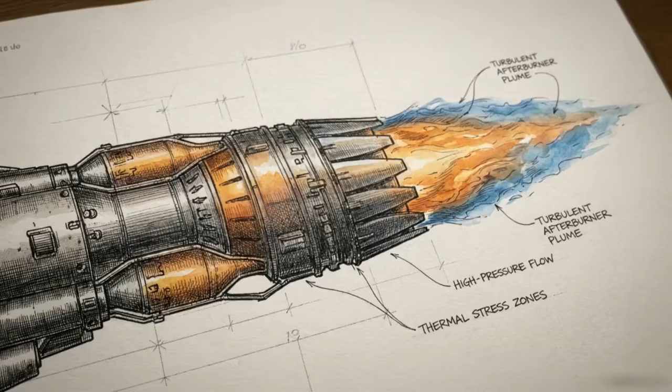Mastering aerospace propulsion is one of the most grueling industrial filters a nation can face. Designing an airframe requires mastery over aerodynamics. Building the engine that powers it requires absolute mastery over extreme thermodynamics.

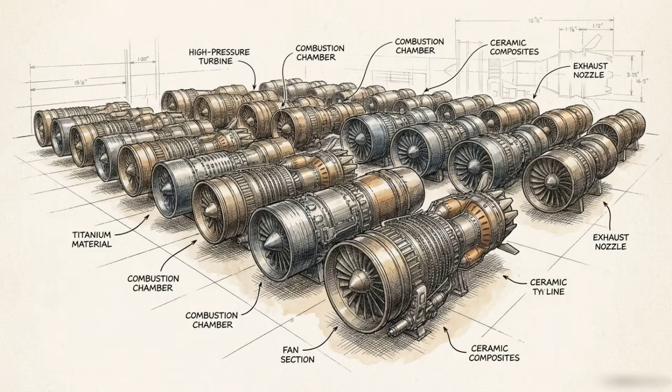In the 1980s, India launched the GTX-35VS Kaveri engine program. The objective was to provide an indigenous power plant for the HAL Tejas light combat aircraft. The scope of the research and development effort was massive. Over 3 decades, the gas turbine research establishment spent approximately $250 million. They built 9 prototypes and conducted 3,217 individual tests.

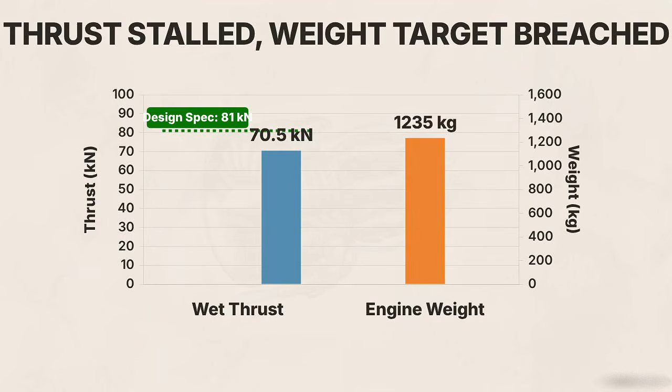This chart reveals the critical shortfall. Designed for 81 kilonewtons of wet thrust, actual output stalled at 70.5. Simultaneously, it suffered a severe weight overshoot. Against a target of 1,100 kilograms, the hardware weighed 1,235, with early prototypes peaking over 1,400.

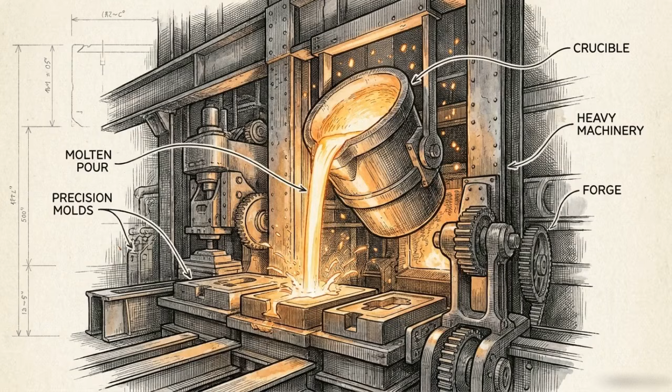The Kaveri did not fail because of a miscalculation in its aerodynamic design. The project hit a hard physical limit in materials science, located entirely within the engine's hot section. An engine cannot be willed into existence through blueprint design alone. To achieve target thrust, a manufacturing base must be capable of conquering the extreme temperatures of the turbine core.

India attempted this technological leap largely in isolation, a condition catalyzed by the 1998 Pokhran nuclear tests. In response to the tests, the international community imposed severe sanctions. This immediately cut off the Defense Research and Development Organization from Western metallurgical technology and critical testing infrastructure.

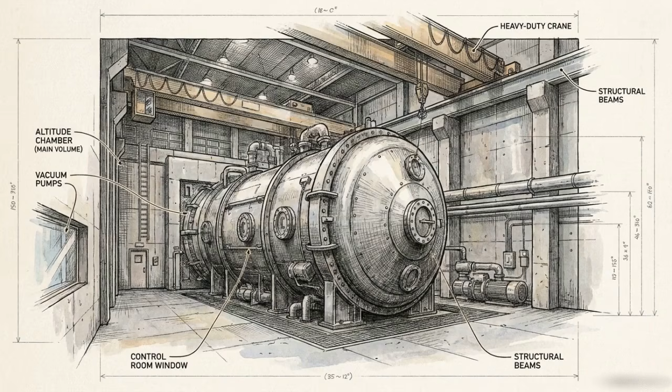The domestic infrastructure gap was severe. India possessed no facilities capable of simulating high-altitude atmospheric conditions. To validate the Kaveri prototypes, the testing process had to be outsourced to Russia, utilizing Tu-16 and Il-76 flying testbeds. These geopolitical sanctions exposed a harsh industrial reality. Without a mature domestic manufacturing ecosystem, engineering teams are incapable of bypassing a metallurgical bottleneck.

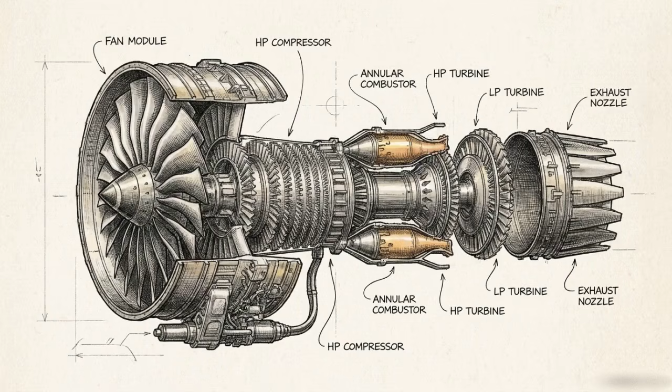To understand exactly why the Kaveri stalled, we have to look past the macro history of the program and isolate the microscopic point of failure, the high-pressure turbine blade. This schematic cross-section of a turbofan engine highlights the high-pressure turbine.

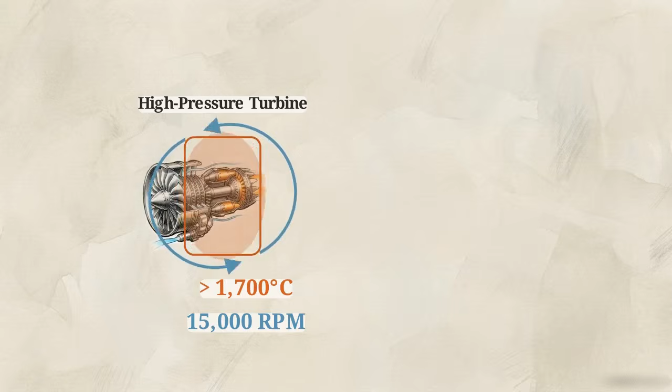This is a hostile operating environment. The ambient temperature of the ignited fuel and air mixture exceeds 1,700 degrees Celsius, while the turbine spins under a centrifugal load of 15,000 RPM. This environment is governed by turbine entry temperature, or TET. There is a direct mathematical correlation here. Higher turbine entry temperatures yield greater thermodynamic efficiency and higher raw thrust.

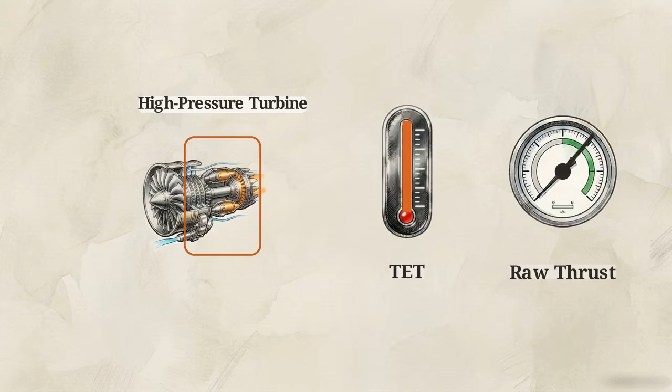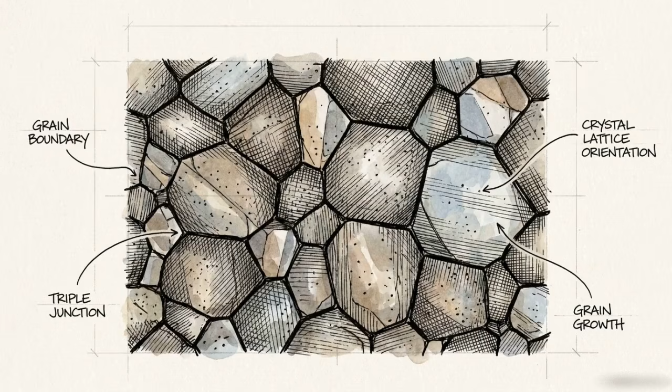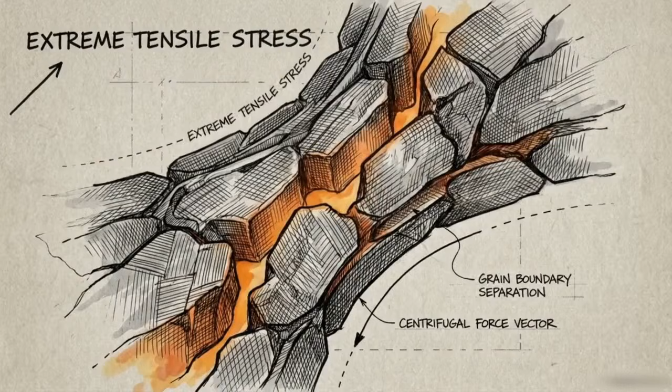Early Kaveri prototypes relied on standard polycrystalline alloys. At a microscopic level, these metals are composed of multiple intersecting crystal grains packed together. When subjected to the dual assault of 1,700-degree heat and massive centrifugal stress, the boundaries between these crystal grains become weak points. They stretch, deform, and crack. In metallurgy, this failure mechanism is called creep rupture.

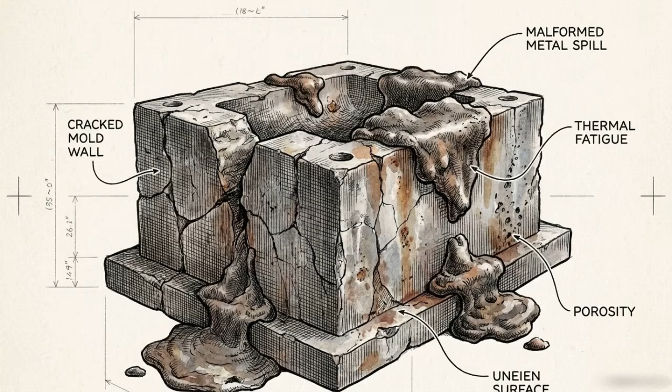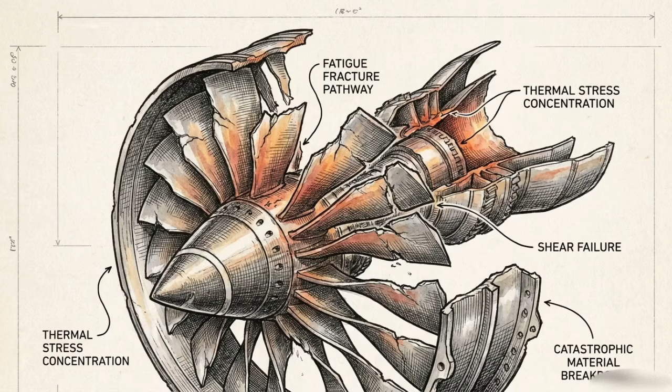India lacked the scaled production capability for the high-purity superalloys required to survive peak TET. Without those materials, increasing the heat to reach the 81 kilonewton target would result in the physical destruction of the turbine. Eliminating creep rupture requires a specific manufacturing breakthrough, single crystal metallurgy.

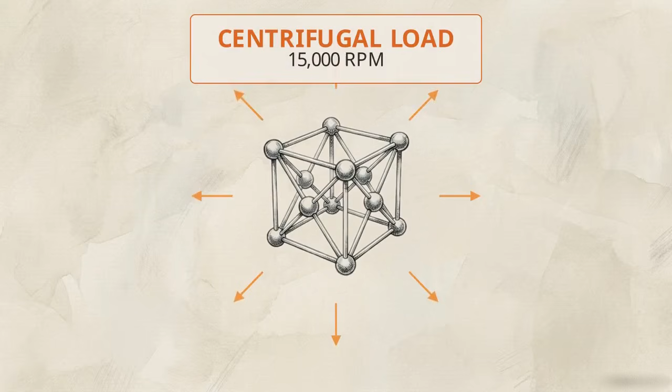This process relies on directional solidification and vacuum melting. By drawing the molten superalloy through a helical crystal selector, engineers can force the metal to cool into a single unified crystal lattice structure, entirely eliminating internal grain boundaries. Because there are no internal boundaries to separate, this unified structure is highly capable of resisting centrifugal stretching and fracturing, even at 15,000 RPM. However, scaling the production of these superalloys is exceptionally difficult.

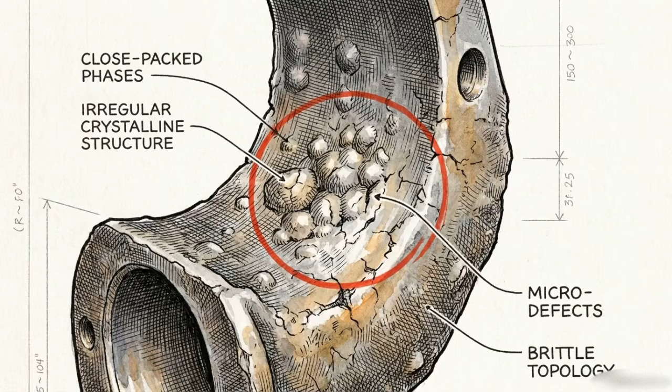The materials are brittle and must be cast perfectly free of defects or topologically close-packed phases, a precision threshold DRDO struggled to achieve domestically. Mastering single crystal metallurgy is a non-negotiable prerequisite. Without it, a high-thrust combat engine cannot function.

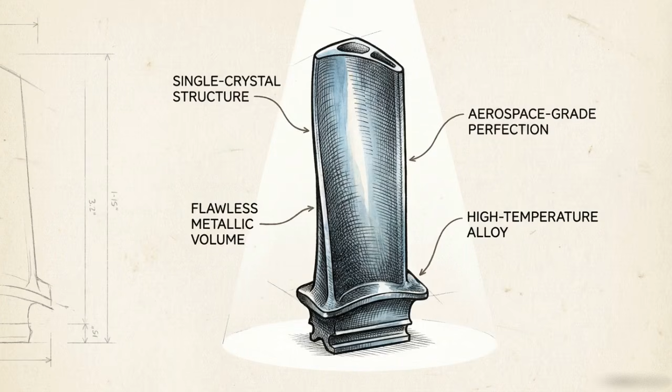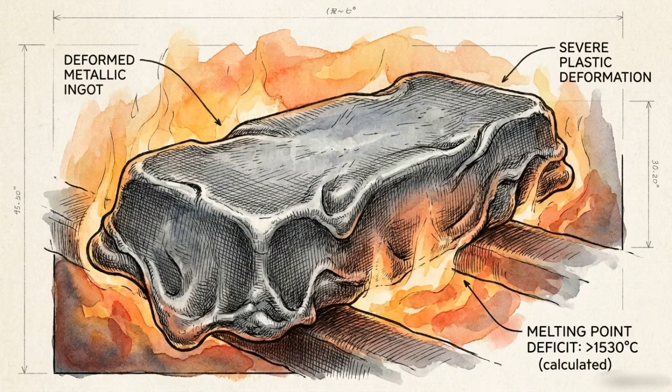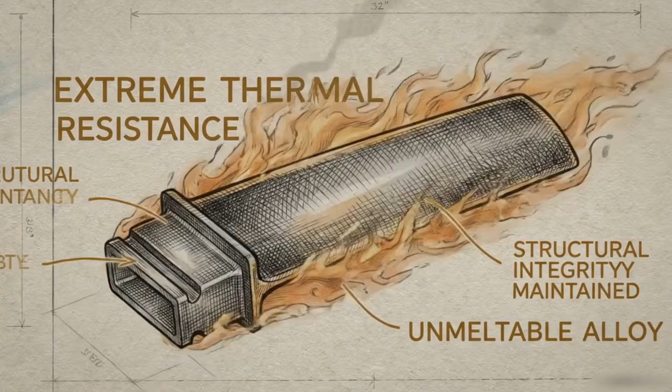Between 1 and 3% of the cooler air from the compressor stage is bled off and routed directly into these hollow, serpentine channels inside the blade itself. This internal air escapes through micro-perforations on the exterior of the metal. This is known as film cooling, and it creates a continuous protective thermal boundary layer over the blade's surface.

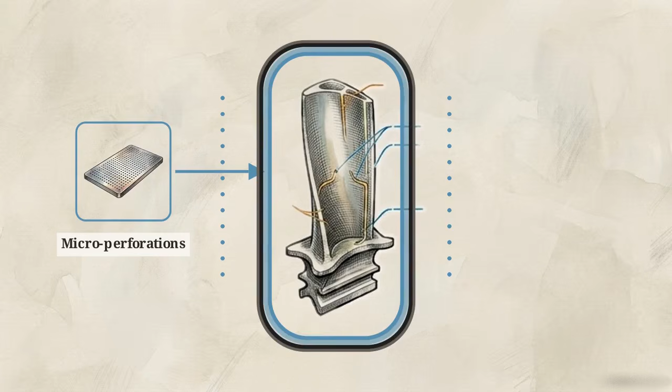The final layer of defense relies on thermal barrier coatings. Highly porous ceramics, specifically yttria-stabilized zirconia, are applied directly to the metal to insulate it from the raw gas path. Executing this requires extreme micro-manufacturing precision. GTRE lacked the submicron electrical discharge machining tolerances required to drill these perforations flawlessly.

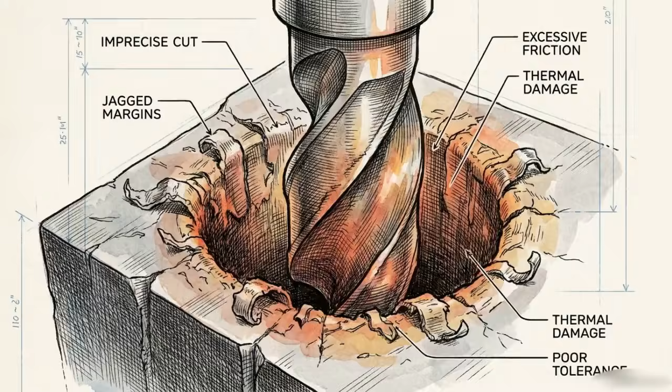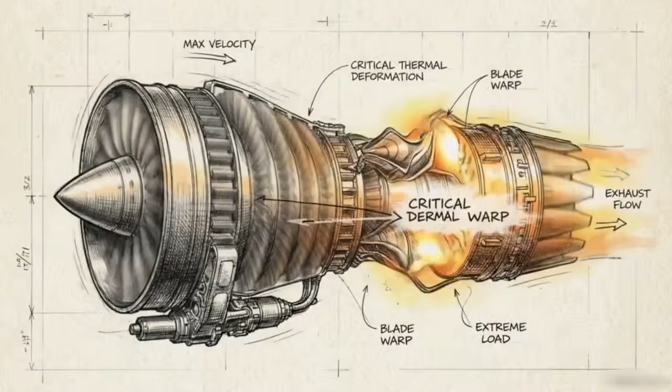The result was severe thermal inefficiency and excess weight added to compensate for the cooling flaws. Without the industrial base to execute these microscopic cooling architectures, the Kaveri engine was physically incapable of reaching 81 kilonewtons without melting its own core.

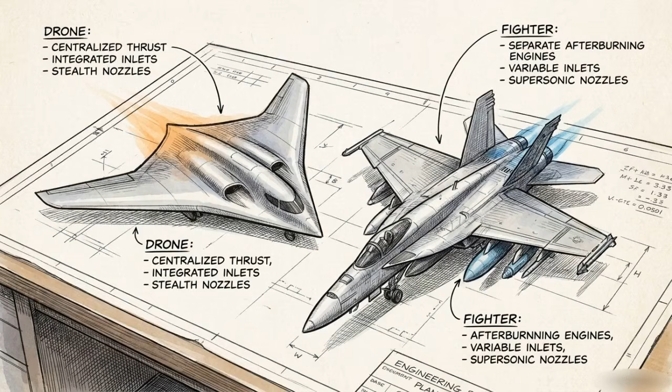Acknowledging this metallurgical gap forced a pivot in strategic planning, resulting in a bifurcated propulsion pipeline. Rather than abandoning decades of research, GTRE salvaged the core of the engine by stripping away the complex afterburner module, creating the Kaveri derivative engine.

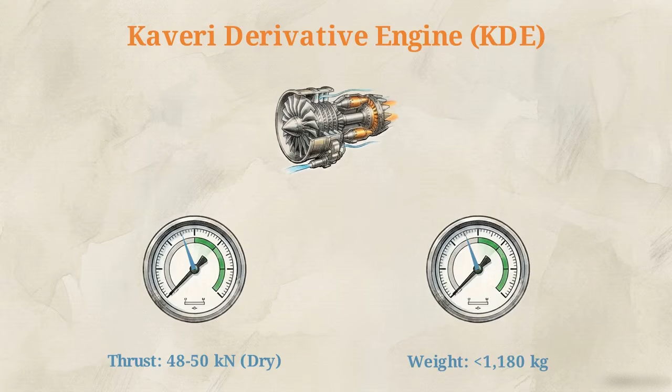Stripped of the afterburner, the new engine operates with reduced specifications. It generates between 48 and 50 kilonewtons of dry thrust, bringing the total weight down below 1,180 kilograms. Operating as a strictly dry engine significantly reduces the peak turbine entry temperature and the corresponding extreme thermodynamic stress. This reduction in heat makes the domestic technology viable, reliable, and flightworthy.

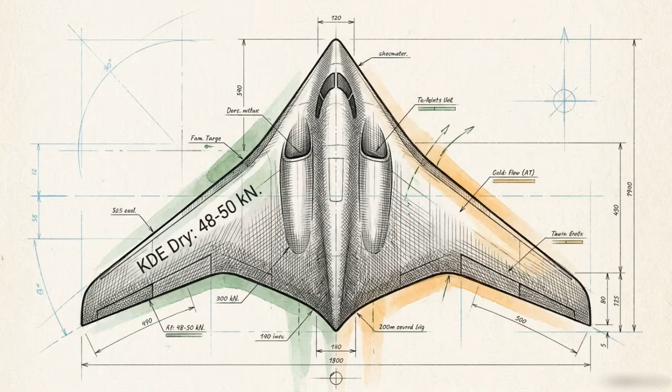This dry derivative will power the DRDO Ghatak, an indigenous stealth unmanned combat aerial vehicle slated for flight testing in the late 2020s. The 40-year Kaveri program yielded a functional power plant, an iterative stepping stone securing the propulsion necessary for India's future unmanned stealth fleet.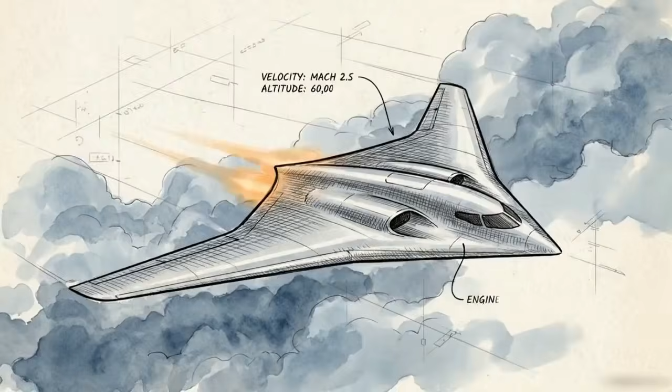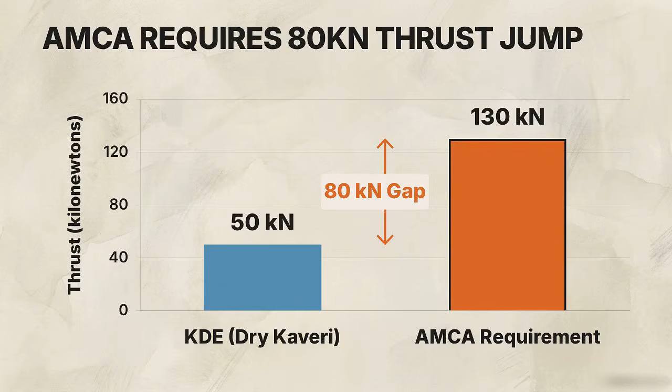India's upcoming fifth-generation manned fighter, the AMCA, demands a staggering 110 to 130 kilonewtons of thrust. The domestic technology utilized in the dry Kaveri derivative cannot safely bridge an 80 kilonewton gap. To secure this power, India entered into a $7 billion strategic partnership with France to co-develop the AMCA engine alongside the aerospace manufacturer Safran.